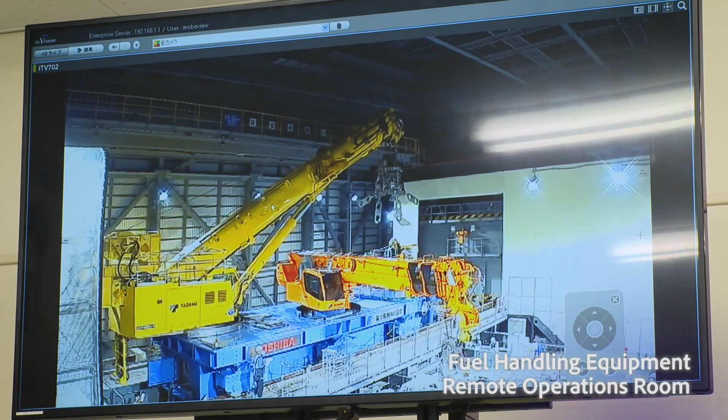Training is being conducted in the remote operations room to remove fuel from the spent fuel pool inside the reactor building.

The fuel handling equipment includes 3 cranes that are operated by remote control.

35-year-old Nino Kyonosuke is giving instructions.

The young engineer is engaged in the design, development, and operation of robots and other equipment.

A key focus is to make each movement with great care, ensuring there's no risk of contact between the cranes and other equipment on site.

This is something that could not be confirmed during factory tests.

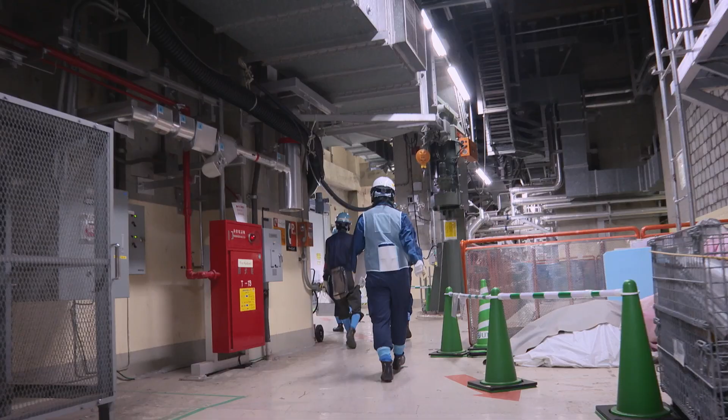22-year-old Kaminuma Shiena works to manage the maintenance of plant machinery.

She came to work at the power station out of a desire to contribute to recovery in Fukushima, her home.

I'll perform each task to the best of my ability to help bring about recovery in Fukushima.

ALPS stands for Advanced Liquid Processing System.

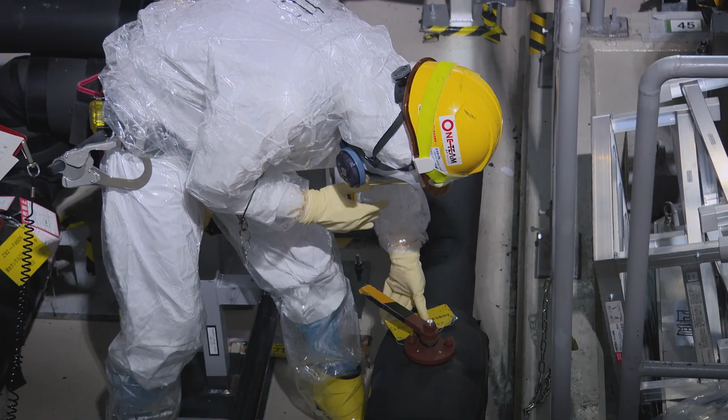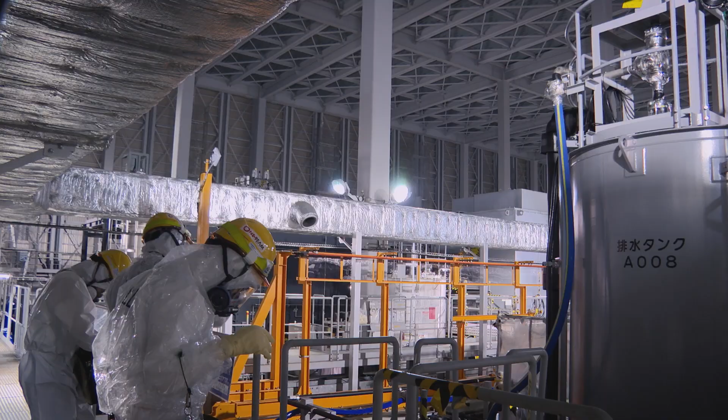ALPS is key equipment that removes radioactive materials from contaminated water generated when cooling water that has come in contact with fuel debris inside the reactor buildings mixes with rainwater and groundwater.

31-year-old Kurosawa Takumi inspects and maintains this equipment.

It's important to follow procedures, perform pointing and calling, and stop immediately if anything seems out of the ordinary.

34-year-old Kawamukai Koji is on Kurosawa's team.

Honestly speaking, there was a lot of pressure since an error with valve confirmation or operation could lead to major equipment failures.

15 years have passed since the Fukushima Daiichi accident. This program shines a spotlight on the younger engineers responsible for the long-term decommissioning process and the challenges they encounter.

The Fukushima Daiichi nuclear power station faces the Pacific Ocean.

With 6 reactors on a large swath of land, Fukushima Daiichi was a major power supplier for the Tokyo metropolitan area.

The tsunami resulting from the Great East Japan earthquake caused a loss of power.

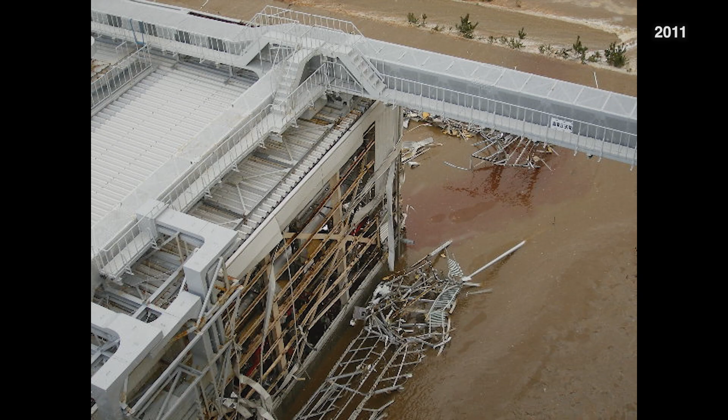It became impossible to cool units 1, 2, and 3, and the fuel assemblies overheated and melted, thereby causing other structures inside the reactor to melt.

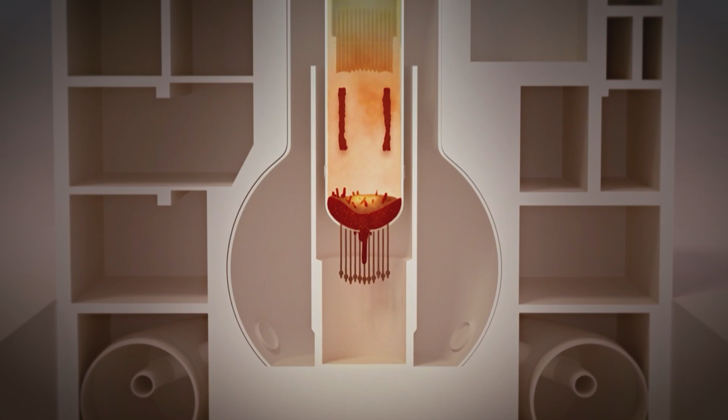These molten materials fell and solidified, becoming fuel debris.

As the fuel assemblies melted and fell, large amounts of hydrogen were generated, which led to explosions in the reactor buildings of units 1, 3, and 4, damaging the facilities and dispersing radioactive materials.

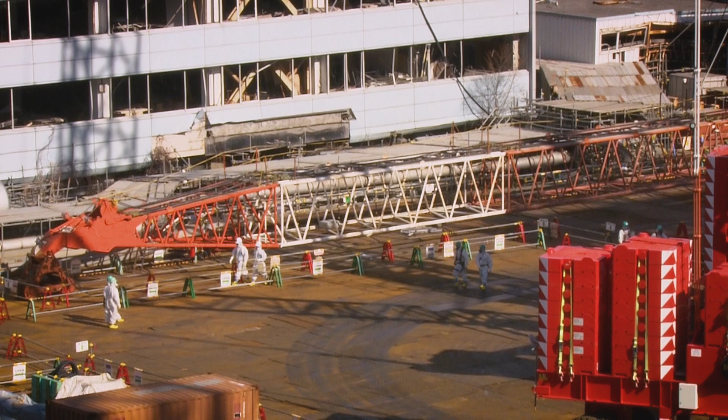Since the accident, working conditions have significantly improved through decontamination efforts. In the majority of areas, workers now only need standard work clothes with simple masks.

Between 3,600 and 5,000 people work on-site each day.

In order to lower the risks associated with radioactive materials resulting from the accident, decommissioning tasks include removing fuel from spent fuel pools, contaminated water countermeasures, fuel debris retrieval, and waste management.

This kind of decommissioning is unprecedented and is being carried out by numerous companies and engineers.

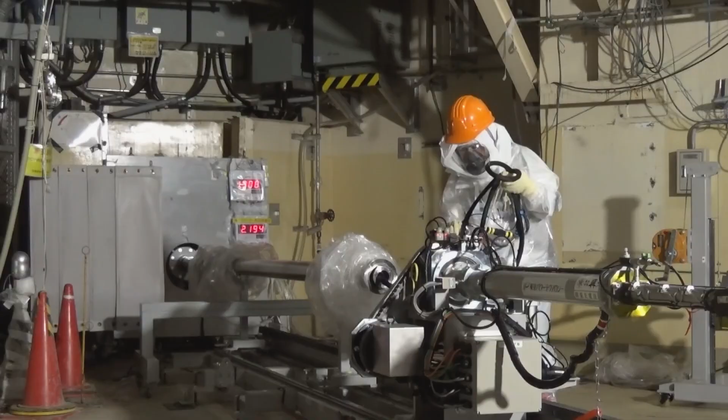As we move forward with the unprecedented task of full-scale fuel debris retrieval, which has never been done before, we will transcend the barriers of position and standing to build trust and collaborate with local entities and partner companies as one team so as to share information on objectives and issues while heightening safety in an effort to complete decommissioning.

4:30 a.m. A single car pulls into the parking lot.

Every morning, crane operator Nino Kyonosuke parks here to transfer to a company bus that takes him to work.

This is the office of the company where Nino works, located about 3 kilometers from the Fukushima Daiichi nuclear power station. His workday begins at 5 a.m.

The day starts early for a reason. During the summer between May and October, employees report to work at 5 a.m. to avoid the danger of heat stroke when working in the dangerous afternoon temperatures.

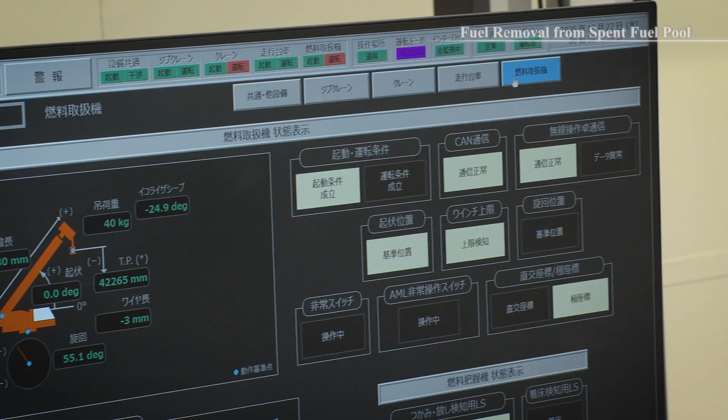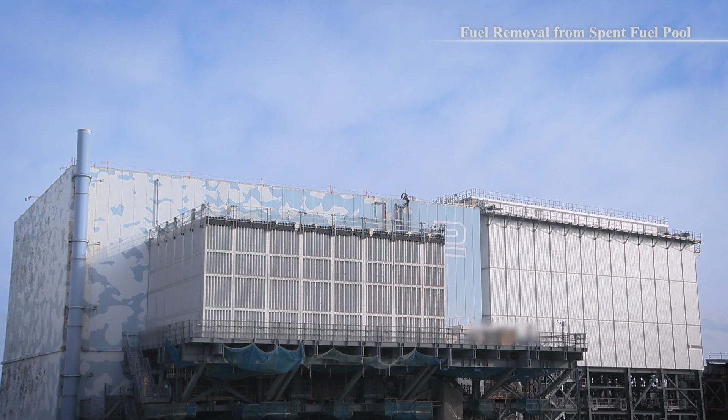The cranes used to remove fuel from the spent fuel pool of Unit 2 are controlled remotely from this room. As the crane operator, Nino steadily makes preparations. Let's look at the conditions at Unit 2.

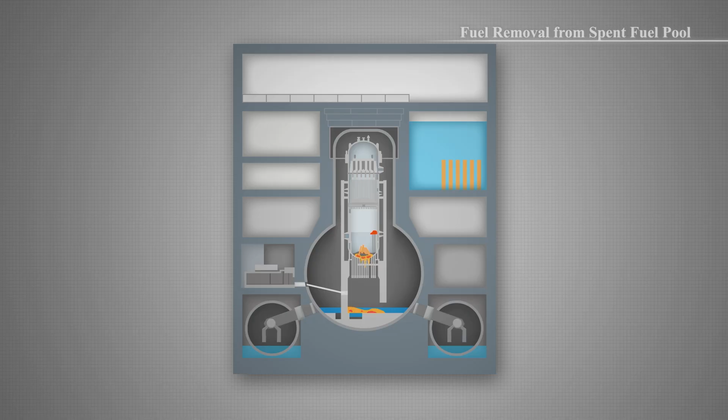Since there was no hydrogen explosion in the reactor building, it has retained its original appearance. However, the accident caused radioactive materials to spread from the containment vessel into the reactor building, and radiation levels inside the structure remain high. At the top of the 62-meter-tall reactor building is a spent fuel pool, where 615 fuel assemblies remain.

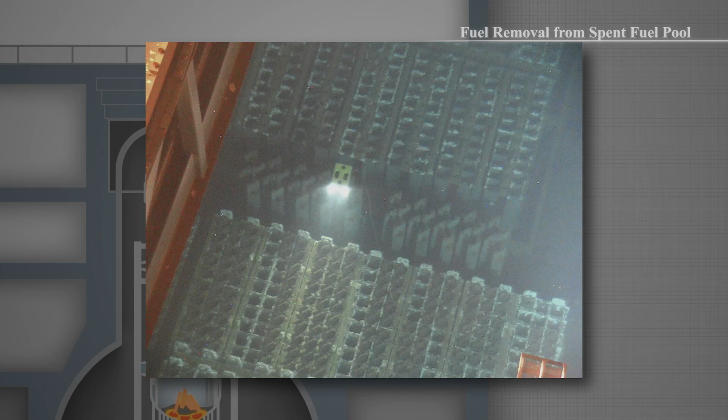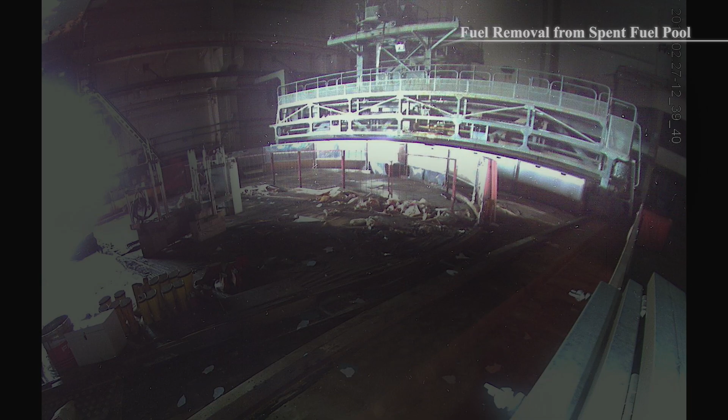A crane for removing fuel assemblies had originally been a part of this fuel pool facility. However, it was rendered inoperable by the accident, so figuring out how to remove the fuel was a major issue. Ultimately, the decision was made to begin development of a new crane.

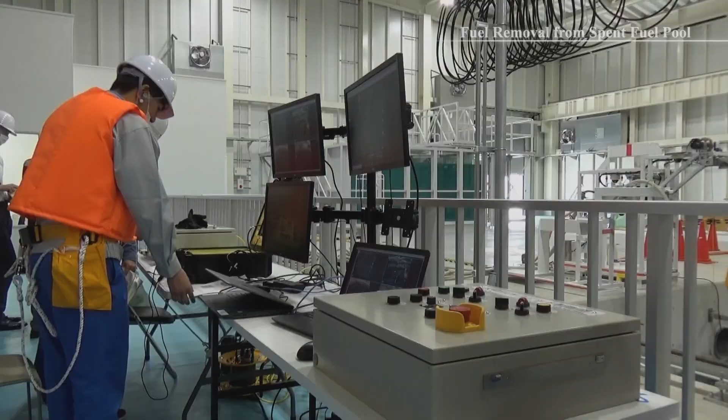At that time, Nino was an employee of the Tokyo Electric Power Company working in the mechanical systems group, where he was in charge of tasks using robots. I was frequently involved in deploying remotely operated robots to decontaminate areas where people could not enter and conduct survey investigations of high radiation zones.

In June 2020, an investigation of the Unit 2 spent fuel pool was conducted using a submersible robot. Its pilot, operating from a remote location, was Nino.

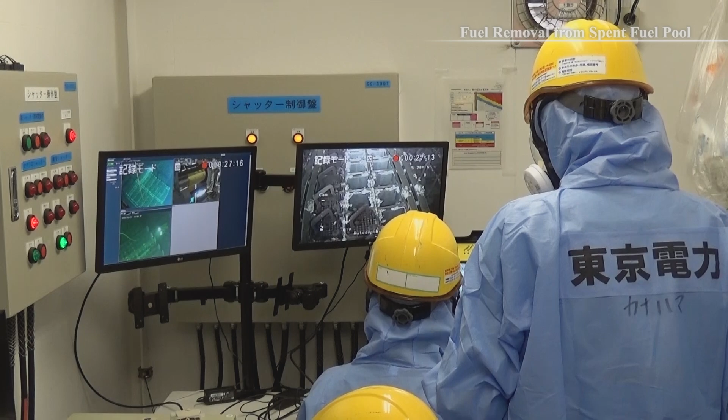July 2023. In recognition of Nino's skills in remote robot operation, he was dispatched to a partner company developing the new crane's technology. As a member of the development team, he proposed various ideas. Drawing on my previous experience with remote operations, I proposed speed settings for safely operating the crane and gave suggestions on how to position and arrange the cameras used to monitor the entire system.

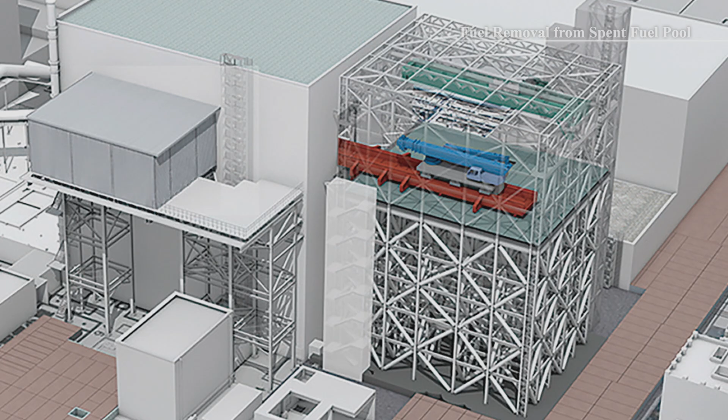To install a new crane, the exterior walls of the reactor building would have to be demolished. However, this would release the radioactive materials into the environment. Therefore, the decision was made to instead create a small opening in the wall through which a crane could be inserted and installed above the fuel pool inside the reactor building.

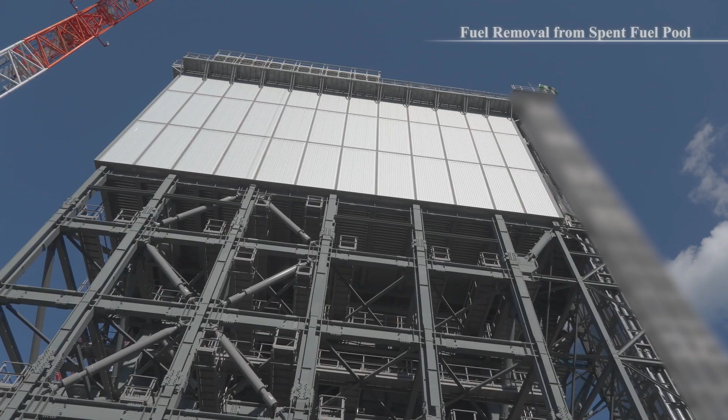To accomplish this, a support structure the same height as the top of the fuel pool was built on the south side of the reactor building. The work platform measures 45 meters high, 33 meters wide, and 27 meters deep, and took approximately 2 years to complete.

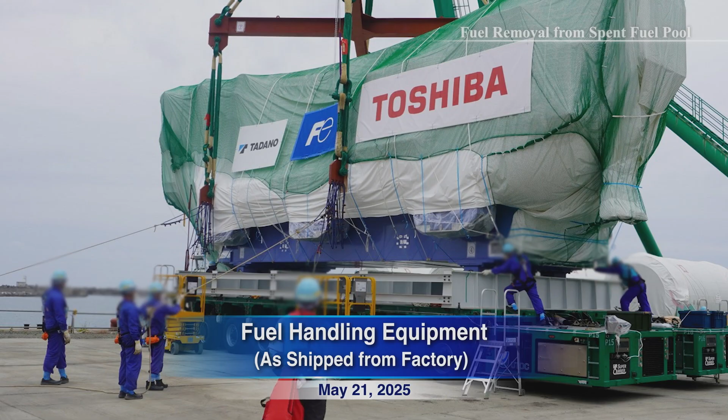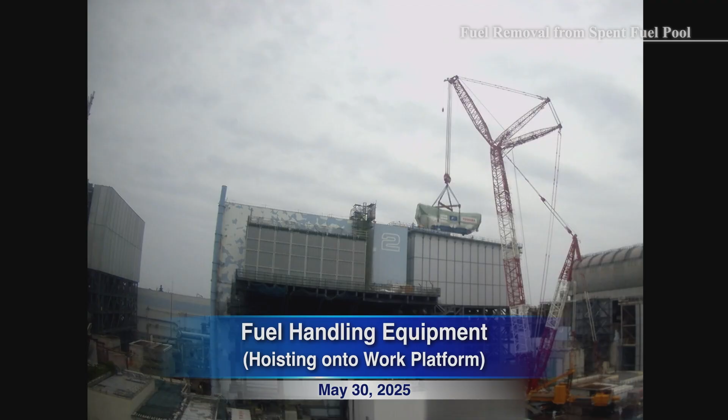In May 2025, the first fuel handling equipment to include 3 cranes in Japan was finally completed. The fuel handling equipment was transported to the power station and placed on the work platform.

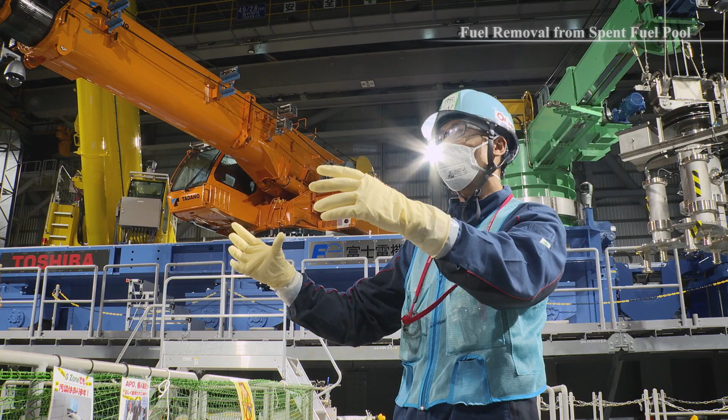This newly developed fuel handling equipment has 3 cranes situated compactly on a single trolley. The fuel handling equipment has 3 cranes and sits atop this blue trolley. Each of the cranes performs a different task.

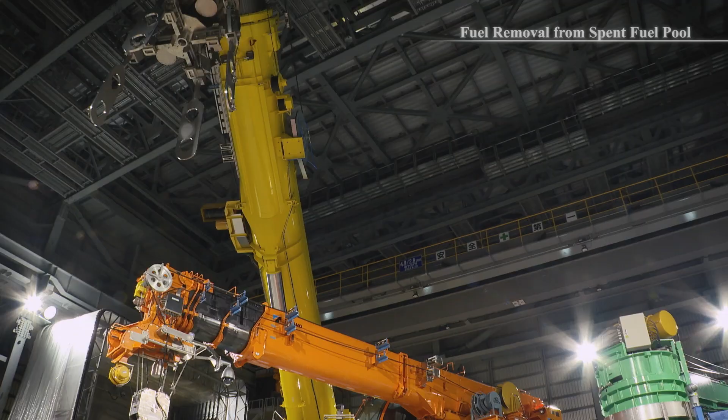The largest crane, the yellow one, is used to handle the on-site fuel transport casks that the fuel assemblies are to be put in. The orange crane is a specialized fuel handling crane that grasps the spent fuel assemblies and places them into the casks. And the green crane is used to open and close the lids of the casks handled by the yellow crane.

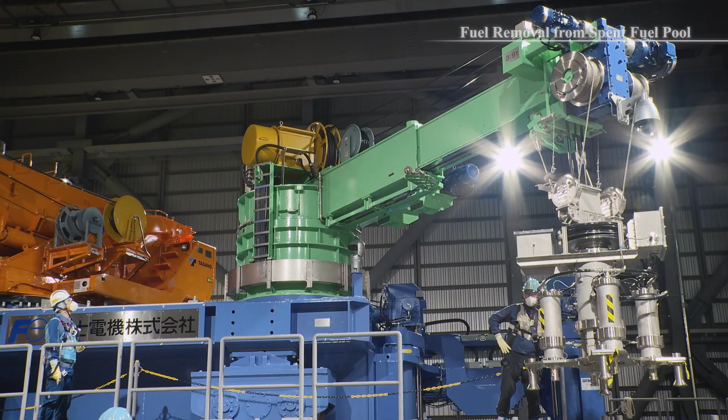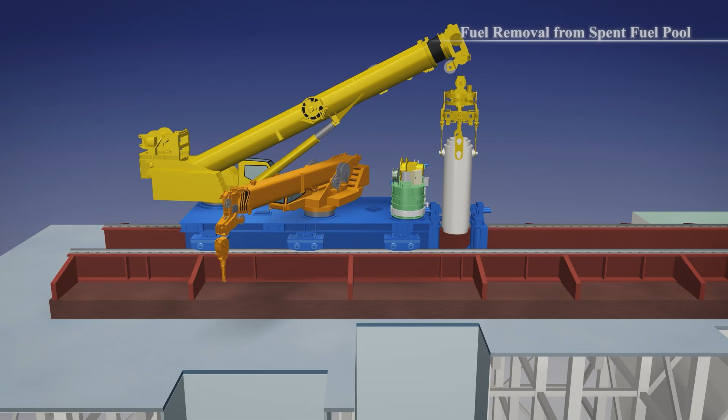The procedure for fuel removal is as follows. The yellow crane picks up and hoists the on-site transport cask up to the work platform and places it on the trolley. Then, the trolley moves into the reactor building.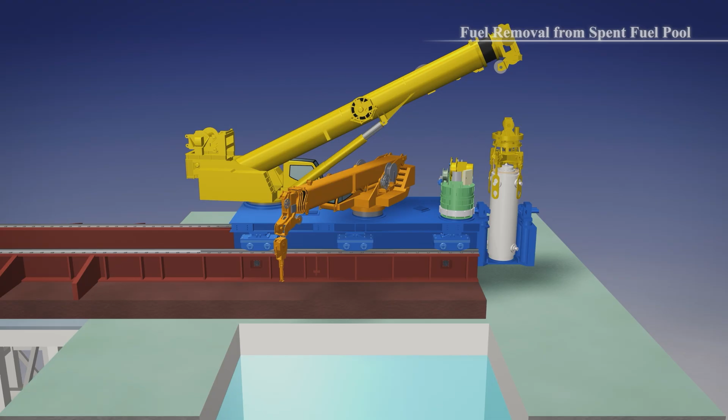Once the fuel handling equipment is inside the reactor building, the yellow crane lowers the cask into the spent fuel pool.

Next, the green crane opens the lid of the cask. The orange crane then picks up a fuel assembly and places it into the cask. Each cask can hold up to 7 fuel assemblies. Once the assemblies are secure, the green crane closes the lid of the cask.

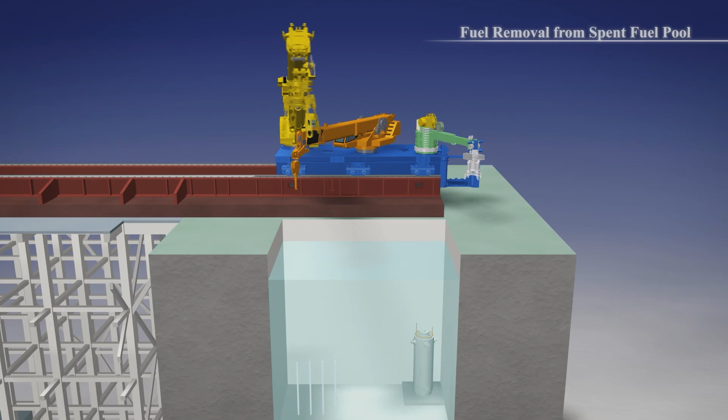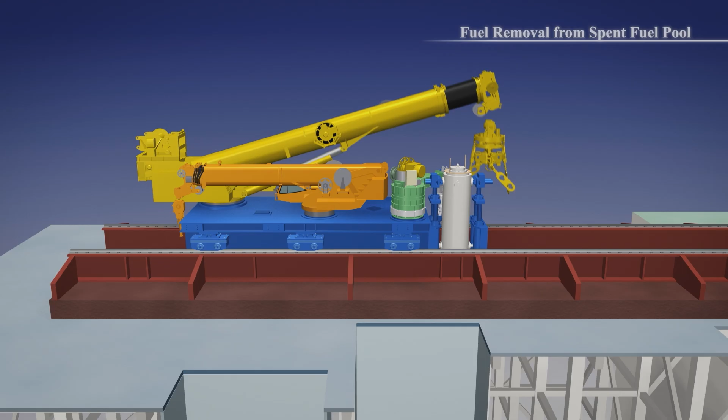The yellow crane lifts the cask back up and returns it to the trolley. The trolley moves back from the reactor building to the work platform, where the yellow crane is used to lower the cask to the ground and load it onto a specialized vehicle. The fuel assemblies are then transported to a common pool, thereby completing the procedure.

The high radiation levels inside the reactor building make entry impossible, so countermeasures have been implemented. We anticipate various potential problems and have formulated redundant measures to handle them. For example, the power supply has a duplicate redundant system. So do instruments for measuring boom angle and rotation position.

They all have redundancy measures. So, even if one or more of the main instruments somehow becomes inoperable, there are countermeasures in place so the task can still be safely completed.

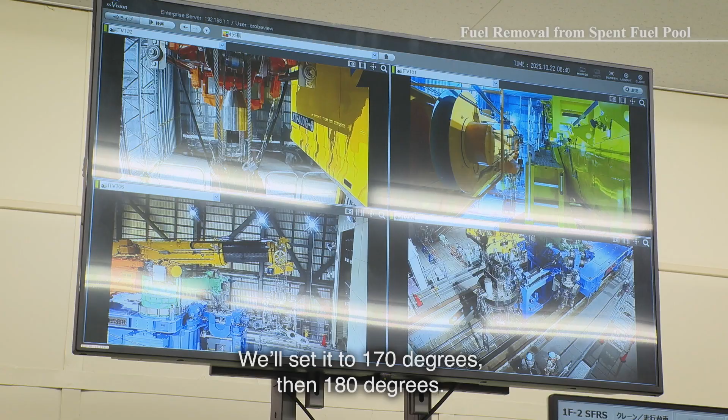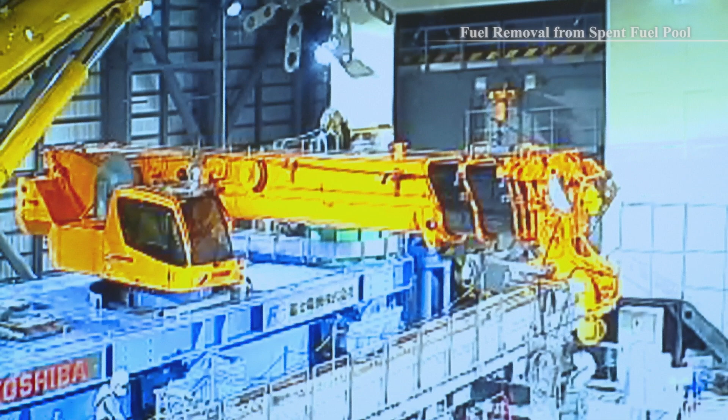After successfully completing tests of the fuel handling equipment on the gantry, plans were made to move it into the reactor building the following week. Due to the high radiation levels inside the reactor building, the fuel handling equipment operation must be performed from a remote location.

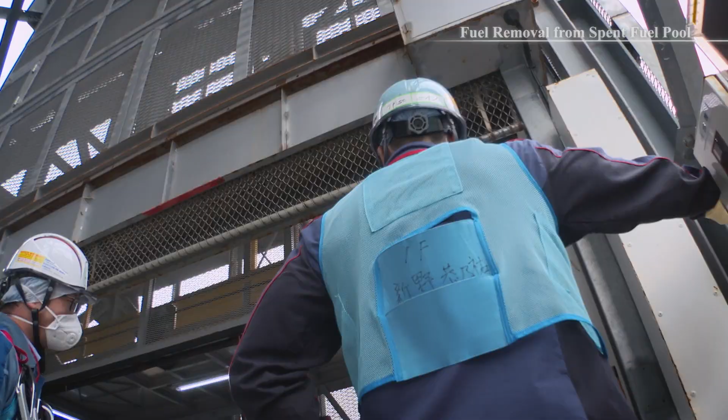Final adjustments are made before moving the fuel handling equipment inside the reactor building.

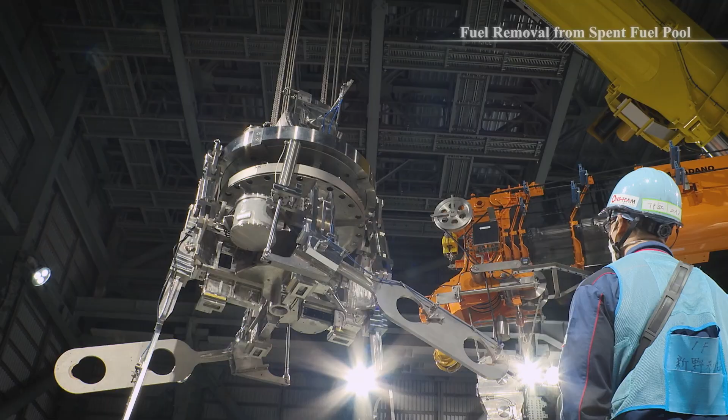Repeating the complex crane operations required to remove all 615 fuel assemblies is far too much work for Nino to complete alone. Before beginning fuel removal, a special fuel removal team will be trained in the crane operations required. The ultimate goal is to remove all the fuel in the Unit 2 spent fuel pool, which will then be moved to a safe location. First, the special fuel removal team will have to gain the skills needed to remove the fuel assemblies safely. Fuel removal is scheduled to begin after April 2026 in order to provide enough time for thorough training.

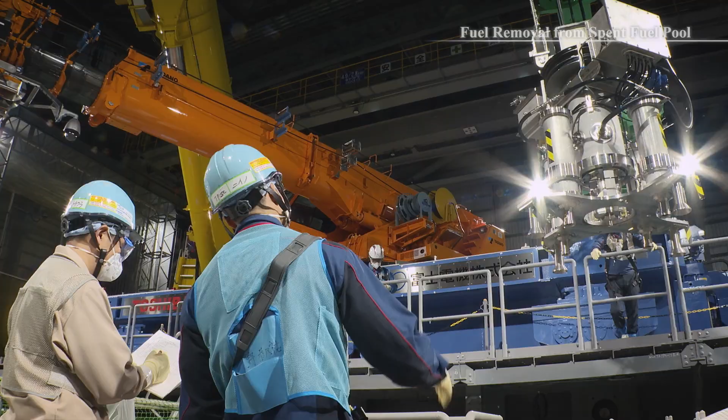Nino is playing basketball with his 5th grade son, Iori. Iori has recently joined a local team and is actively practicing. I started playing basketball when I was in elementary school. I still play quite a bit for fun. Bringing my son along might have had some influence on him.

My dad is usually really nice, but when it comes to basketball, he can be strict. I'm not that good yet, but I think that I'm getting better little by little.

The time Nino spends with his son has become a precious opportunity to relieve the stress of his daily work duties.

This is the mechanical equipment group at the Fukushima Daiichi nuclear power station. They are responsible for the maintenance management of mechanical equipment such as the pumps and piping used to cool the spent fuel inside the reactor buildings of Units 1 through 6, as well as the emergency diesel generators.

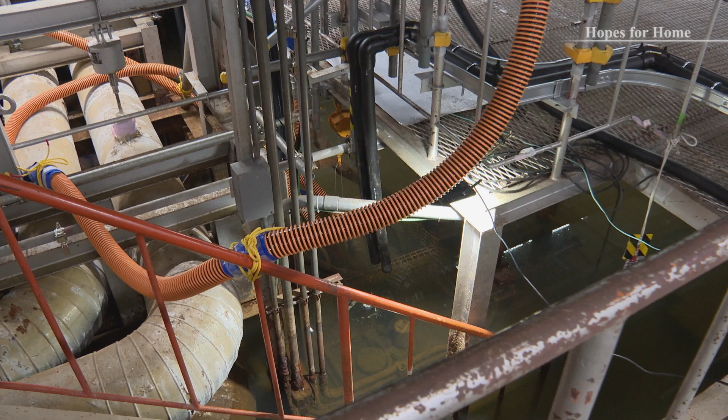These are Units 5 and 6. At the time of the accident, both were shut down for regular inspections, so no radioactive material was released. However, the tsunami that followed the earthquake damaged the facility, allowing groundwater to flow in. To prevent the power equipment in the basement from being submerged, this groundwater must be pumped out regularly.

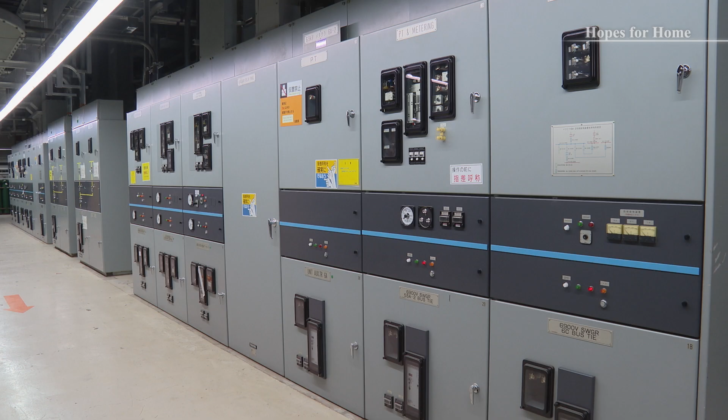Today, Kaminuma is overseeing the work site where the water in the building's basement is being pumped out. I had concerns about my abilities, but after being assigned to this group, I found everyone to be quite kind, and I'm able to enjoy my work.

My duties involve identifying risks at the work site. For example, tripping. We identify where someone may trip and injure themselves and implement countermeasures to prevent it from happening.

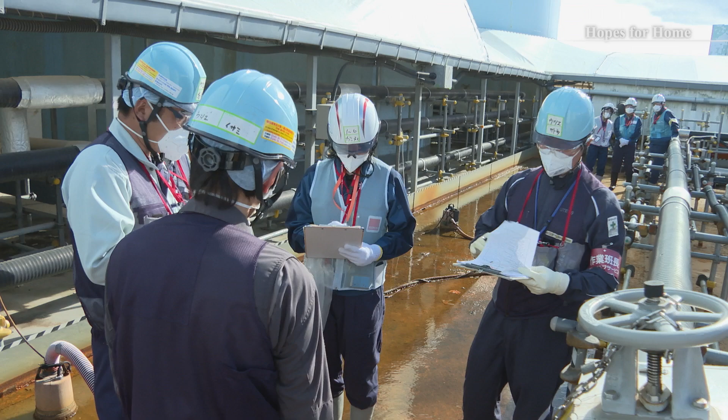When Kaminuma joined the company, she did not have any particular knowledge or skills pertaining to mechanical equipment. This is why she initially felt anxious about her job. However, over the past 3 years, she has received advice and support from her mentors and supervisors, and has become more positive after realizing the importance of working as a team.

Kanno Satoshi is Kaminuma's supervisor. Because Kaminuma didn't graduate from a technically focused high school, I could tell that she really struggled. But she worked hard to communicate clearly with contractors and express her opinions with colleagues. She's a central figure in the younger generation of workers here.

Kaminuma's strong determination to bring about recovery in Fukushima continues. As a local myself, I really want to hear the voices of the community, and I'll perform each task to the best of my ability to help bring about recovery in Fukushima.

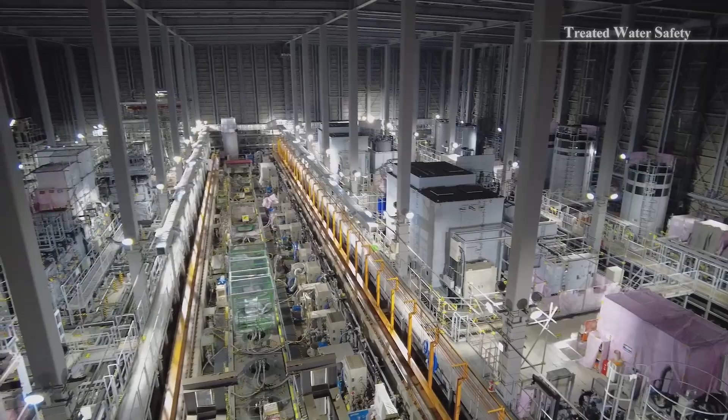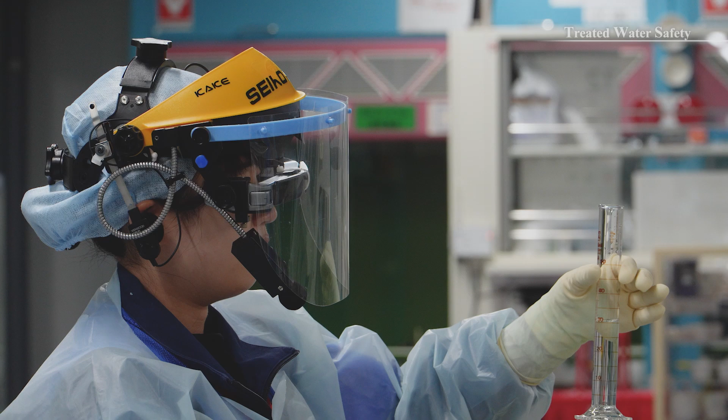An essential part of the decommissioning process is managing contaminated water. Contaminated water generated daily from units 1 through 4 is purified using the multi-nuclide removal equipment, ALPS, and other systems. Treated water is diluted with a large amount of seawater in order to fully meet national and international safety standards before being discharged into the sea.

This technical training center is about a 30-minute drive from the Fukushima Daiichi nuclear power station. Here, various training programs are conducted to ensure that the unprecedented decommissioning work can proceed smoothly.

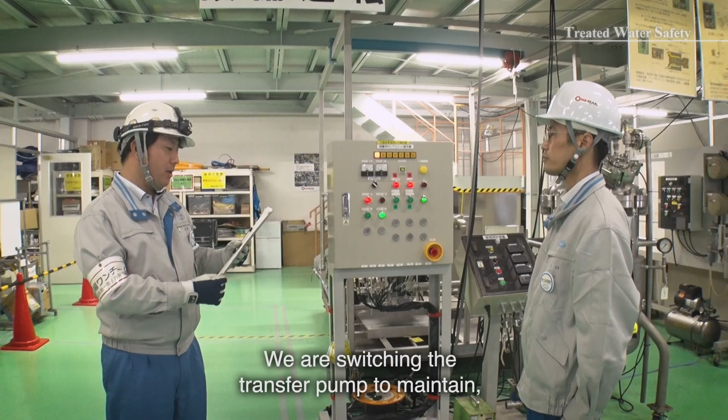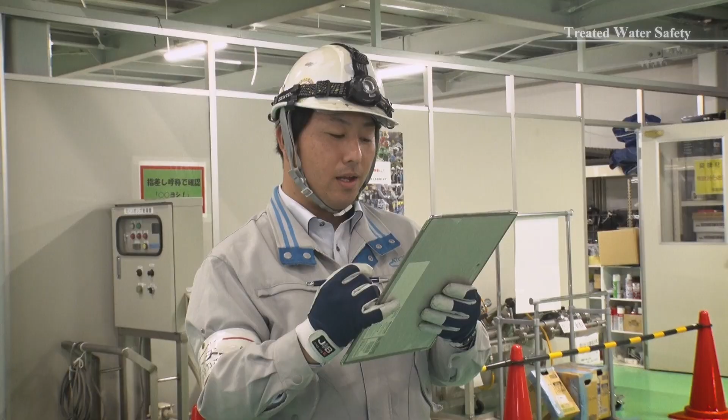目的、ろ過水槽ポンプユニット性能維持確認のため移送ポンプ切り替えを実施します。注意事項。 The training is led by Kurosawa Takumi, a team leader responsible for the maintenance and inspection of ALPS. Kurosawa joined the company in 2017. Since 2024, he has been involved in decommissioning work at the Fukushima Daiichi power station.

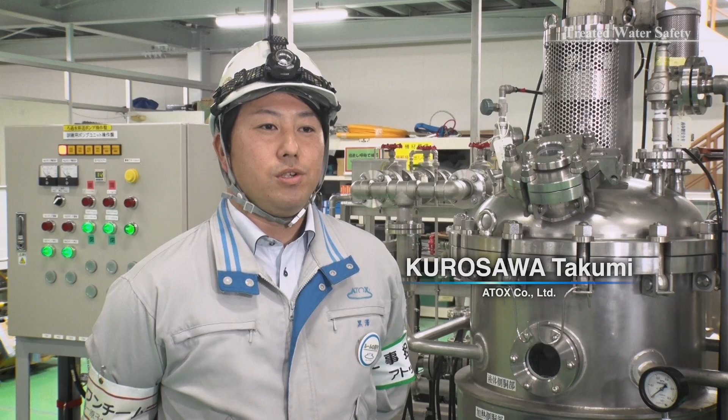Even a single valve operation error on site can cause equipment failure. It's important to follow procedures, perform pointing and calling, and stop immediately if anything seems out of the ordinary. The purpose of today's training is to get used to this process.

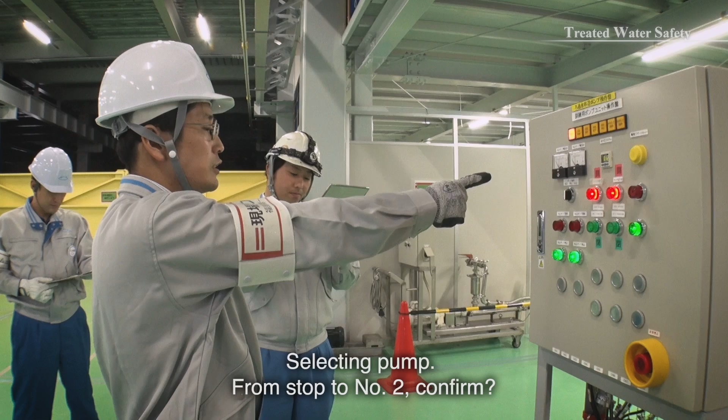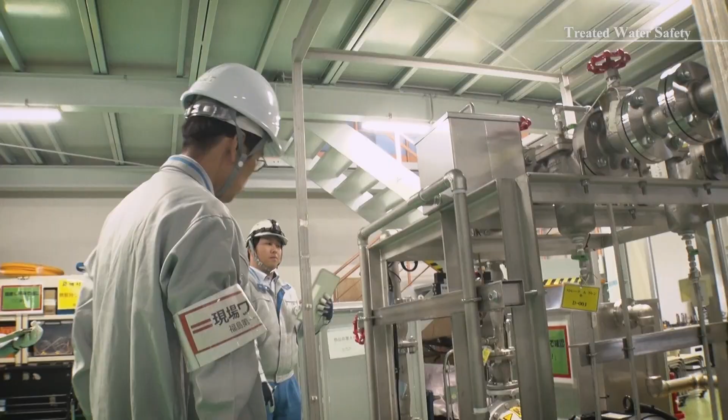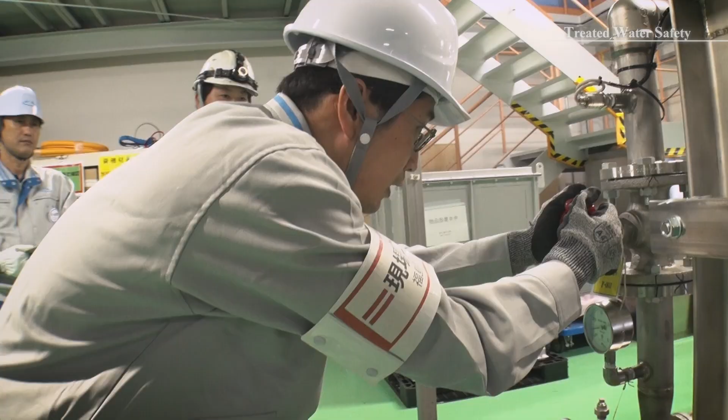Receiving the instructions is Kawamukai Koji. He joined the Tokyo Electric Power Company in 2017 and worked at Fukushima Daiichi on groundwater pumping equipment and ALPS-related construction. In August 2025, he trained at a partner company to improve his technical field skills and accumulate field experience to ensure a safer work environment as decommissioning continues into the future.

Because of this training, I can now better imagine what it will be like to operate valves in the field, and am confident that I can safely perform this task.

Kurosawa and Kawamukai's team are heading into the field to perform ALPS maintenance. They remove their regular work clothes and put on coveralls to prevent radioactive material from adhering to the skin, full face masks to prevent internal exposure, and fully waterproof anorak pullovers to prevent contact with contaminated water. This gear places a significant burden on the body. Even 1 hour of work wearing the anorak is much more physically demanding than I expected, regardless of the season.

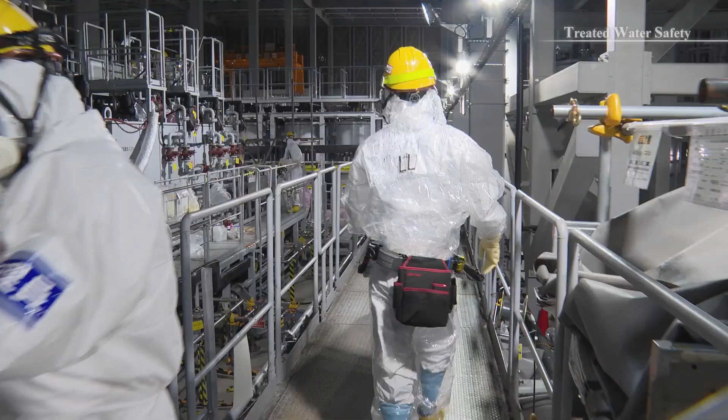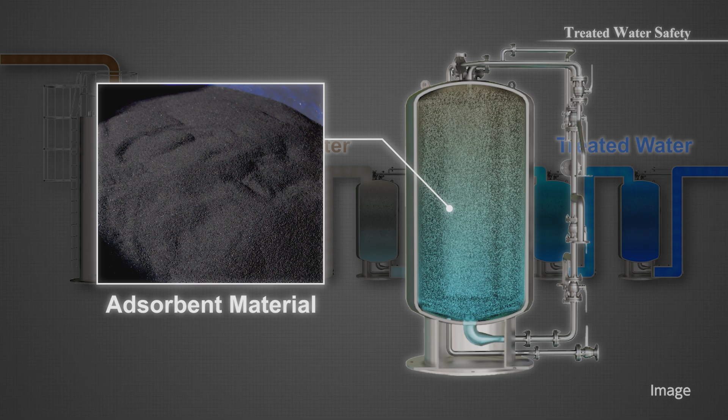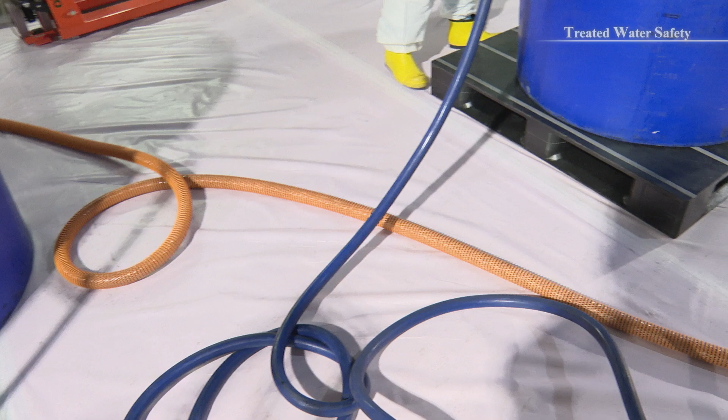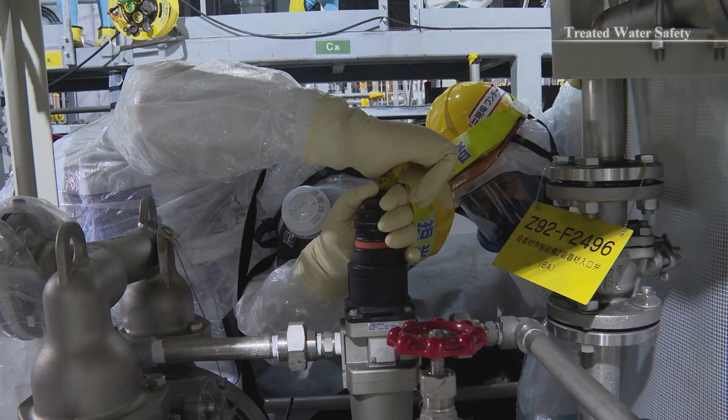ALPS removes a variety of radioactive substances using adsorbents. After use, this material is collected as radioactive waste. Today's task entails filling the tanks with new adsorbent material. Because the adsorbent material doesn't dissolve in water, overfilling can clog the pumps. So we need to monitor pump operation by listening to the sounds it makes while performing the work. The adsorbent material is mixed with water and pumped into the ALPS tanks.

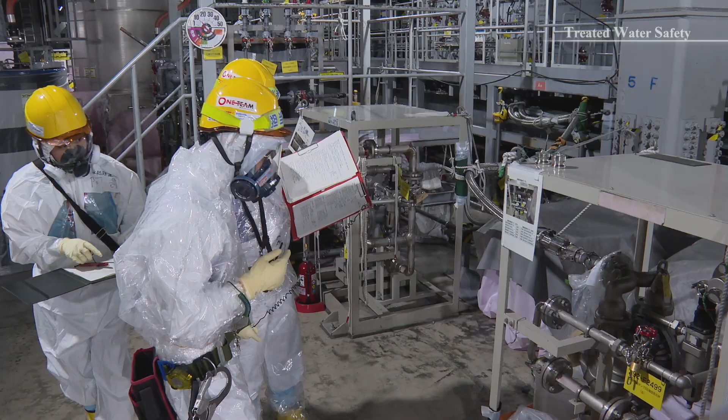Honestly speaking, there was a lot of pressure since an error with valve confirmation or operation could lead to major equipment failures. But thanks to my training and a careful review of the procedures, I was able to overcome that pressure and approach the task calmly. The younger members of the team are working hard together. We want to continue to work as one team as we strive for recovery in Fukushima.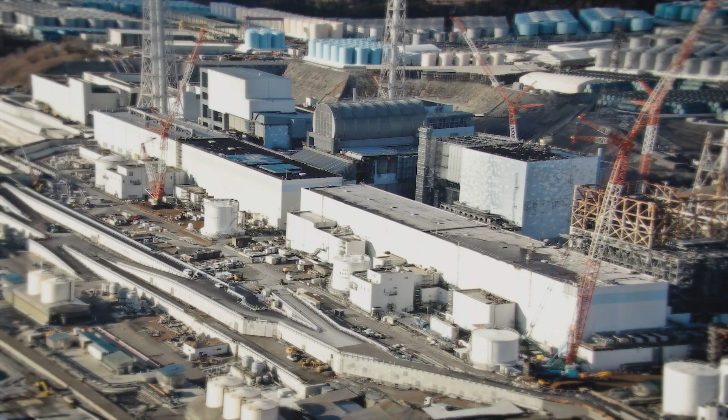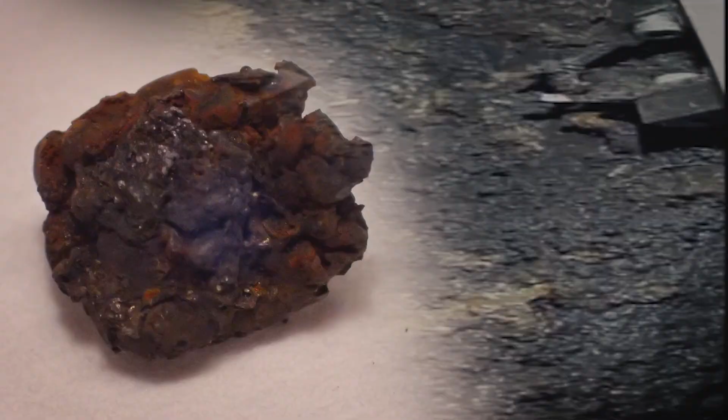The retrieval of fuel debris from Units 1 through 3 will be the most difficult task in the decommissioning of the Fukushima Daiichi nuclear power station. In the fall of 2024, a sample of fuel debris was retrieved for analysis from Unit 2. The information gained through analysis will aid with the ongoing design and development of full-scale fuel debris retrieval methods and systems.

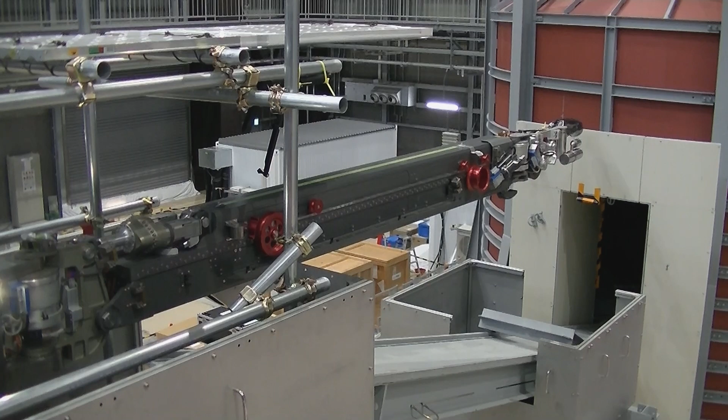We asked Nino, who continues to train for fuel removal, about his hopes for the future. The fuel handling equipment was only made possible because of the cooperation between many people. To honor their efforts and not let anything go to waste, I plan to be thoroughly prepared for the task at hand and approach the work as part of our one team until the entire decommissioning project is safely complete.

The decommissioning of the Fukushima Daiichi nuclear power station is an unprecedented task. Over the decades-long process, young engineers on the front lines will overcome numerous challenges and see the task through to completion.